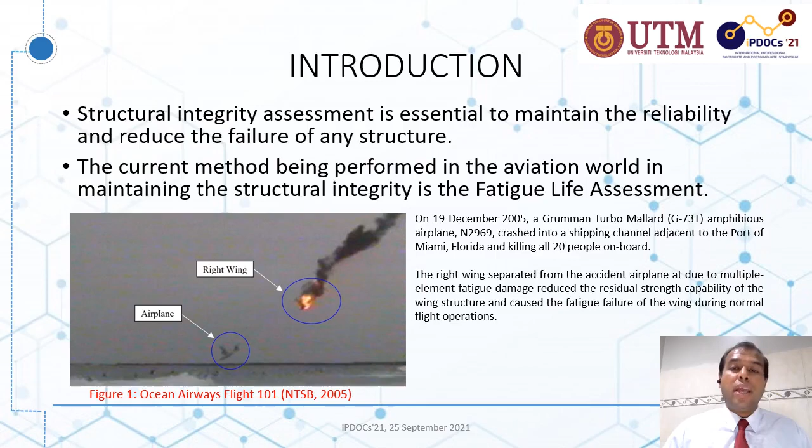As a matter of fact, on 19th of December 2005, an amphibious aircraft, Ocean Airways Flight 101, crashed at Port Miami, killing 20 people on board. Multiple fatigue damage occurring at the right wing has reduced the fatigue life of the structure and caused this incident.

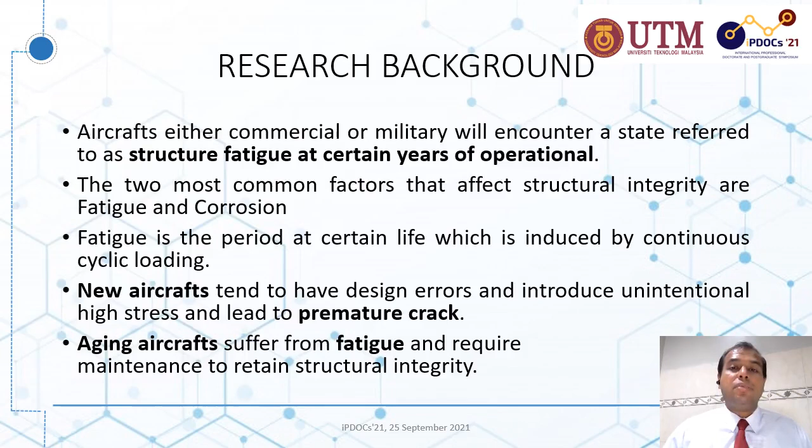Aircraft in the commercial world or with the military reach a stage after certain years of operation which is called structure fatigue. Structure reliability is affected by two most common factors, which are fatigue and corrosion. The period when the structure of an aircraft has reached its critical fatigue life is very difficult to determine since it is induced by continuous cyclic loading. The airframe fatigue design principles are divided into two, which are safe life and damage tolerance.

Fatigue is the effect resulting from a component being repeatedly loaded. Failures happen due to the natural characteristic of the material or a damage that is subjected upon the material due to manufacturing or in-service process. It is subjected due to, first, mechanically or thermally induced loading, second, environmental effects to component, third, material characteristics, and fourth, continuous loading.

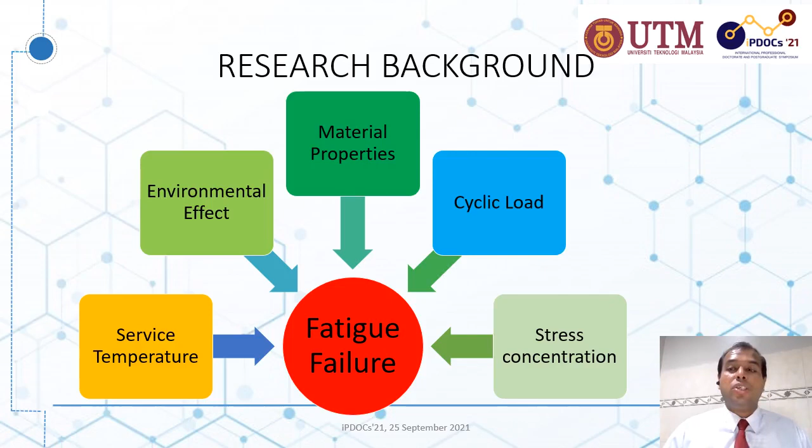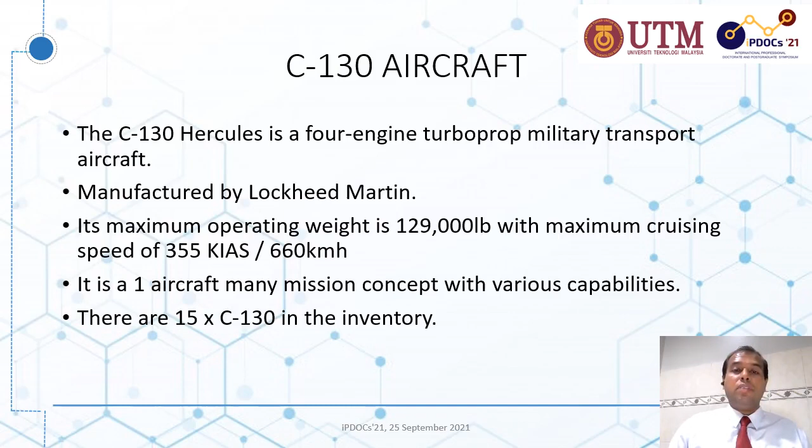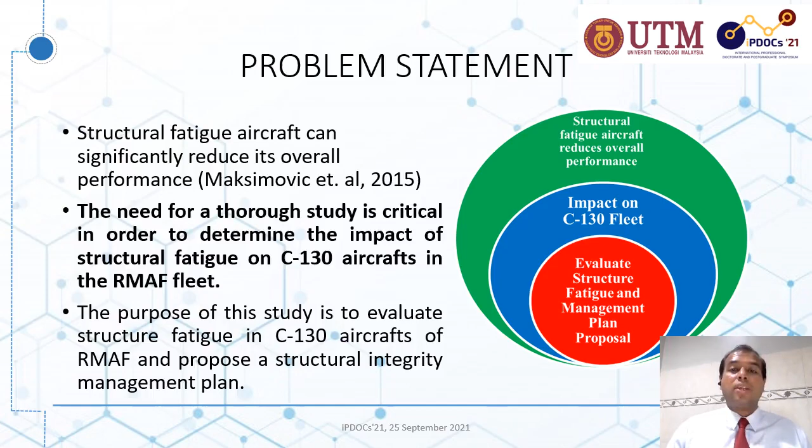Safety is the major concern for all aircraft-related subjects, starting from the design stage till its entire duration of service life. Structural fatigue can significantly reduce an aircraft's overall performance. Due to this alarming issue, a thorough study is critical in order to determine the impact of structural fatigue on C-130 aircrafts in the RMAF fleet.

This research will provide the platform for the structural life extension of the C-130. Besides that, it will also enable us to estimate the remaining fatigue life of the structure. Furthermore, the method used for structural life extension is being established and is capable to be utilized on other aircraft fleets. Finally, this concept also has its commercialization value.

A field experiment method was used to address the operational framework for this research and was divided into three phases. Phase 1 of this study detailed out the critical location and the contributing factors. Besides that, the review of past studies will provide information on critical locations of similar types of aircraft from other operators, since the critical location varies for each type of aircraft.

Moving on to phase 2 of this study, in which the analysis of the critical location, which was identified earlier, was performed. There are a total of 5 major groups in the C-130 structure. They are then further analyzed based on individual aircraft to determine its specific critical point.

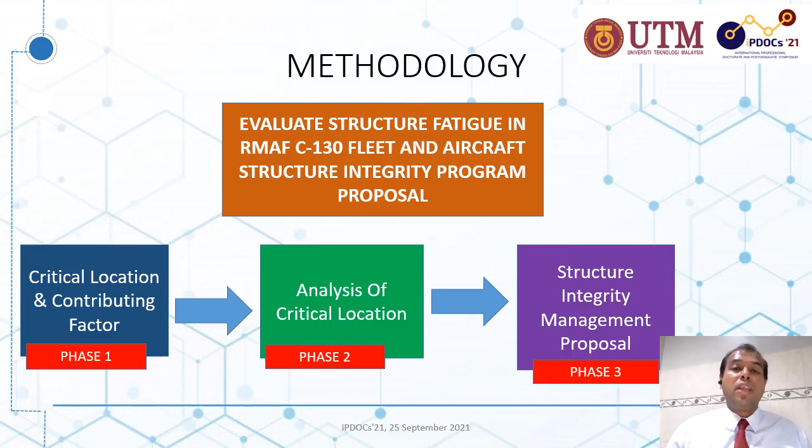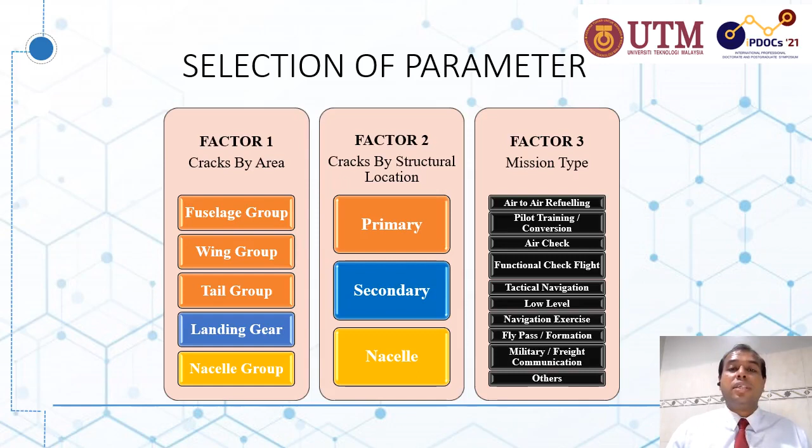To determine the fatigue critical location, a review on the aircraft structural historical data was performed, aided with non-destructive testing. And in the third phase of this study, it will be the development of the aircraft structure integrity program. Stated here are the parameters for my study. They are divided into three factors: first is cracks by area, second is cracks by structural location, and third is types of mission flown by these aircraft.

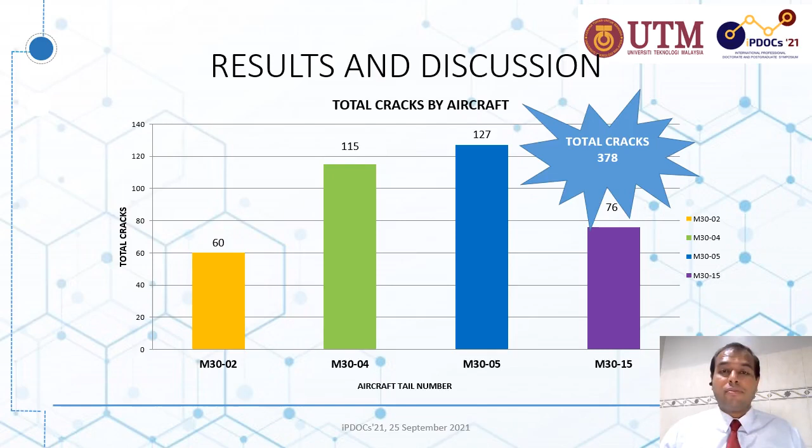Based on the structural condition analysis done using NDT or historical data, a total of 378 cracks were uncovered from all the 4 aircraft, with the highest number recorded from aircraft Mike 3005. The result here indicates the analysis based on structural area and is divided by aircraft tail number. As I mentioned earlier, these areas are the 5 main groups on a C-130 aircraft. The results here indicate that the nacelle area on all 4 aircraft recorded the lowest amount of cracks.

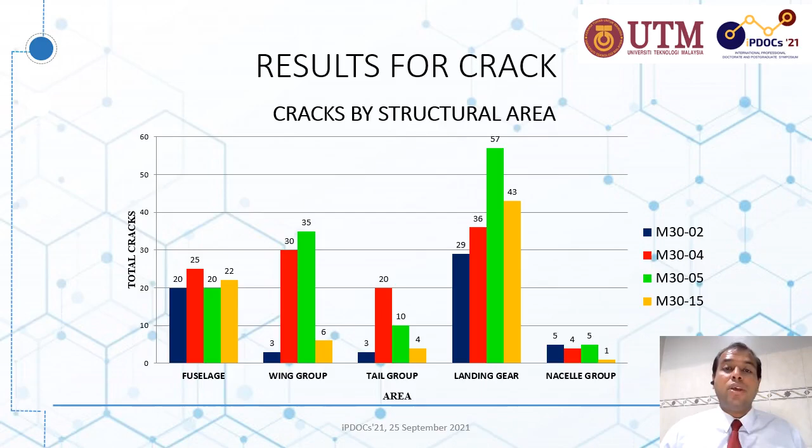Besides that, the landing gear and wing group recorded a higher number of cracks. This is most likely due to high concentration of loads at these locations. The landing gear is the most common area prone to cracks since it is subjected to continuous impact loading during landing and taxiing. The center wing box, being the critical location at the wing area, is also subjected to loads such as bending and tension. Fuselage and tail group are subjected to loads such as aerodynamics due to airflow.

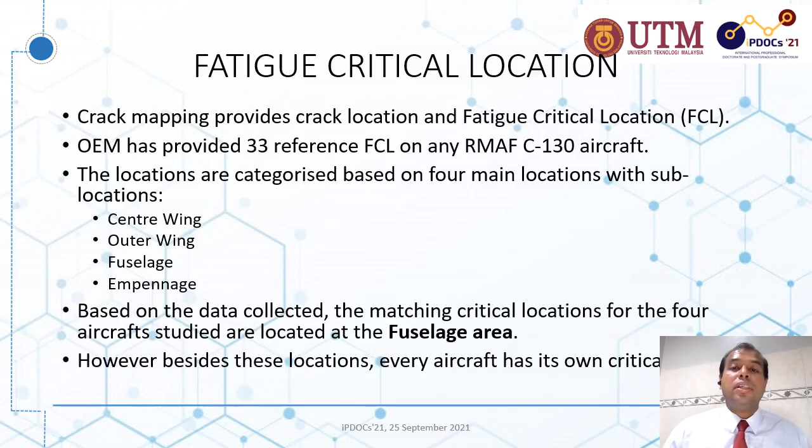Crack mapping not only provides us with crack area but also its fatigue critical location, or FCL. FCL is defined as the structural area that is vital for the aircraft to maintain its structural integrity. These areas are commonly subjected to various kinds of loads. The OEM has provided 33 reference points on any RMAF C-130 aircraft. They are categorized based on 4 main locations. Based on the data collected, the matching critical location for the studied aircraft falls at the fuselage area.

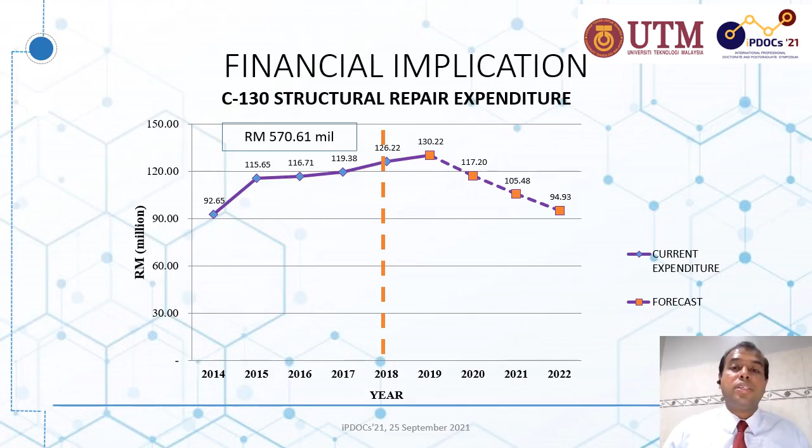Through the years from 2014 till 2018, RMAF has spent nearly a total of 570.61 million ringgit for structural repairs on the C-130. However, since 2019, which marks the initial investment into the ASI program, it is forecasted that the operational expenditure for RMAF on C-130 structural repair will decrease, with a total savings of nearly 36 million ringgit in 3 years.

Aircraft Structure Integrity Program, or ASIP, is a systematic procedure applied to a particular airplane system to predict the operational life expectancy of the airframe. The current scope of ASIP implemented in the RMAF has 4 main areas that monitor the structure integrity: usage monitoring, condition monitoring, fatigue monitoring, and environmental degradation management. The C-130 gives the RMAF a significant and viable long-term option for strategic and tactical delivery for joint and multinational operations. Extending the service life of the aircraft will result in a better return on investment.